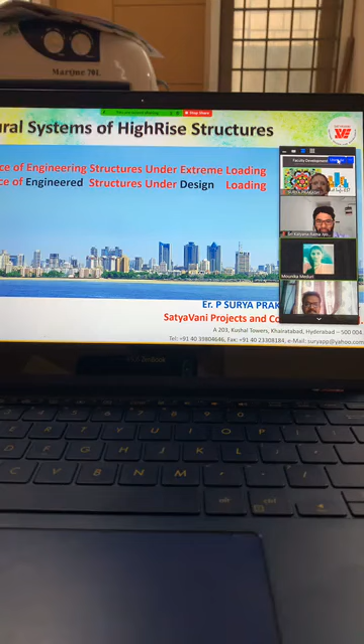The introduction is going on, introduction for me by the VBIT college. Give me 2 more minutes to start my lecture. I'm sure all of you don't need my introduction. I'll start my lecture in 2 minutes. Can you hear me now? Now my introduction is going on in Zoom. I could not get the live stream of the Zoom, that's why I'm silent. I'm hearing their introduction about me.

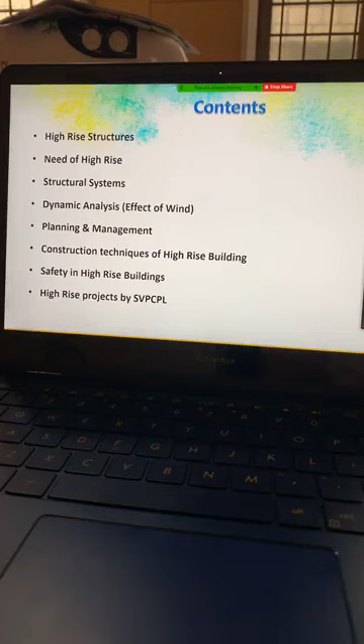What are high-rise structures actually? As per the National Building Code, any structure beyond 15 meters is treated as a high-rise structure. But structurally speaking, high-rise structures are the ones whose slenderness is very high. In that case, the behavior of a normal structure and a high-rise or tall structure differs.

In high-rise structures, my maximum experience is in lattice towers. I have done up to 213 meter tall towers for transmission. We have done FM towers up to 173 meters, microwave towers of 100 meters, lighting towers and lighting masts, and security towers. Security tower means ISRO, Sriharikota rocket launch station.

They need a 120 meter tall tower, putting the earthing wires, that is to prevent lightning attack on the rocket launch stations. And similarly, transmission towers, power transmission. These are all the tall high-rise structures. And masts. We also have masts or poles which are used for both transmission and lighting.

And very many people know about chimneys. Tall chimneys are also coming under high-rise structures. Hybrid towers. That means we had in one time about 30 years back a series of high-rise TV towers which are hybrid, like concrete shaft and then steel mast, steel lattice towers on the top for Doordarshan TV transmission.

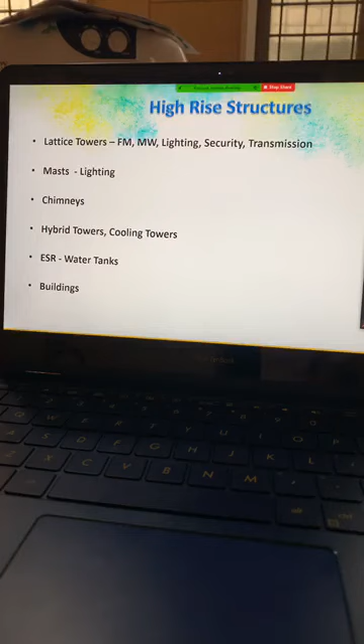Towards the end of my topic, I also did a case study comparison of various structural systems which I'll be covering as part of my lecture. I didn't mention it in the overview, but I have added that comparison this morning. So I'll be showing some of the pictures of these high-rise structures which we have done. Very interesting stories behind them, but I'll not go into all those details.

So we have done almost all communication towers in the country. Of whatever towers you see, one out of every two towers is designed by us. So that is my background. So here you can see FM tower, communication tower, and the police communication towers and the trilons. These are all the towers which we have designed and managed.

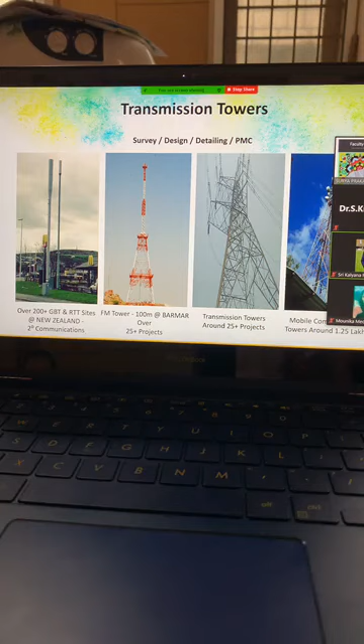And also these masts you are seeing, we have done in New Zealand, and an FM tower of 100 meters in Barmer in Rajasthan, and transmission towers of different types up to 765 kV. And then the microwave towers backbone we have done in India. So this is a high mast.

And this is another communication tower which we have designed for the backbone in Andhra Pradesh for Idea Cellular from Vizag to Hyderabad. And these are all guyed masts also. You will have the tall structure, self-supporting and guyed mast. This is the guyed tower which is used mostly in police communication towers.

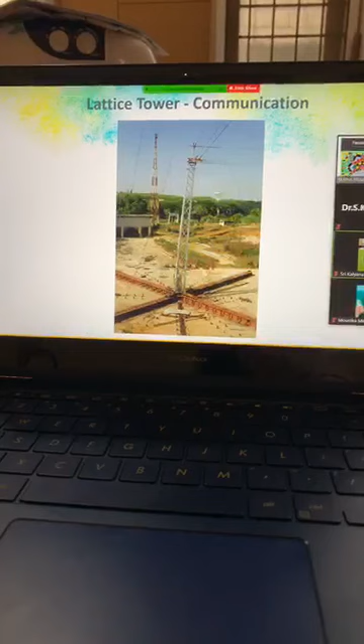So extreme loading means the condition for transmission towers is they should survive till destruction. So we test these towers till destruction. When we test these towers till destruction, they should not survive beyond 20% over and above the design load. So that is the challenge. So we have to be very accurate: 1.06 overload factor to 1.2. Only a 14% margin we have to design the structures.

If I design for lesser capacity, it will fail. If I design for higher capacity, my design is rejected. So this is the challenge in high-rise structures, really interesting. And so your design has to be accurate, your materials have to be of accurate quality, and then fabrication, galvanizing, erection, and then detailing of the structure. So this is the challenge really. And these are the hybrid towers. This is in Rameshwaram.

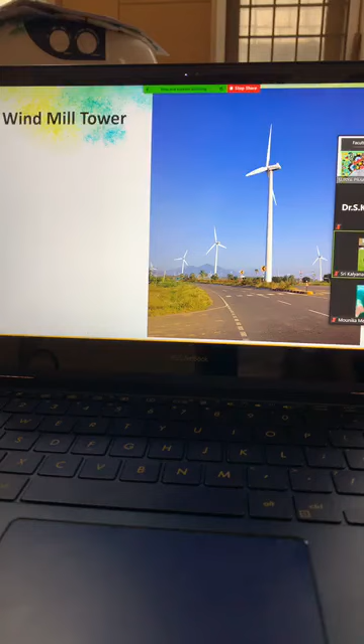So you will see this picture in Kanyakumari, very huge wind farms, with up to 1000 megawatts of power being generated through these windmills. And chimneys, tall chimneys. There are tall chimneys mainly in power projects and this kind of process industries. So chimney design also comes under high-rise structures. Design and construction methods are a challenge in this.

And the elevated storage reservoirs. We do the design of different types of elevated storage water tanks, and these all come under various structural systems. The biggest challenge in elevated storage reservoirs is seismic resistant design. So we have to be very careful in evolving the structural systems, and that's why nowadays we are seeing the funnel type and the shaft type of staging as against column and beam type of staging for these elevated storage reservoirs.

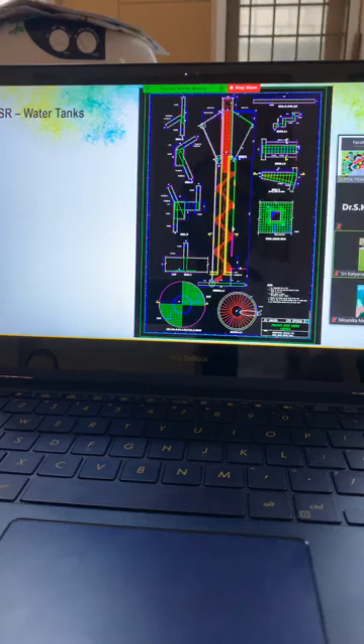So this is another type which we have designed. You have the dome, you have the conical shell, and then we have the cylindrical shell. All these structural systems and detailing, a very interesting structure we have done in Chiralas coastal region. And these are the closer views of these structures.

I am a lover of Santiago Calatrava in terms of structural system, because without ribs, there is no structure. There is a commonality in any type of structure, whether it is an auditorium, a high-rise building, or a bridge. He brings in the common element of the concrete ribs in this. So that's why I've chosen to show this high-rise structure also in my lecture.

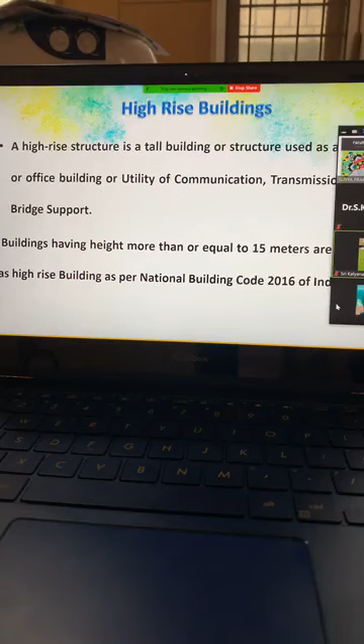Now, we are getting into the core of the topic, that is high-rise buildings. High-rise buildings are very tall structures. As of now, we have the 828 meter tall building, Burj Khalifa. And buildings having height more than or equal to 15 meters come under high-rise as per National Building Code 2016. Because of safety reasons, they defined these high-rise structures.

And we have this high-rise structures code also, IS 16700:2017. There are a lot of debates going on about the applicability and implementation of this IS 16700. That's why I wanted to share some of the important points of this 16700. The code is based on a prescriptive approach. This is in the preamble, covering the design aspects of tall buildings, and the standard is applicable only for buildings that house 20,000 or fewer people. Also this code covers buildings of height greater than 50 meters and less than 250 meters.

So this is the code applicability, the scope of the code you can see. The standard addresses structural wall systems and moment resisting frames, and structural wall and moment resisting frame combinations. And we have flat slab floor systems with perimeter moment resisting frames, structural wall frame tube systems, tube in tube systems, frame tube systems, and hybrid systems of all these. And we have multiple tube, that is bundled tube, and any of the above with traditional framing systems, for example trusses, belt trusses and braced frames, are also covered under this code 16700.

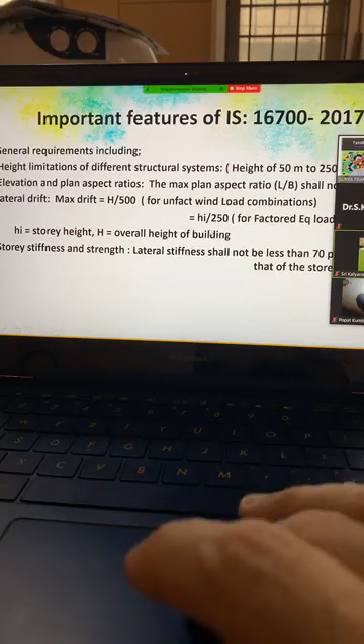So the general requirements are defined regarding the lateral drift. The main important point in high-rise structures is the lateral drift. The lateral drift for buildings is different, and for other structures it is different. Let us please note: height by 500 for unfactored load, and height by 250 for factored load. The height limitations of different structural systems mentioned before are for 50 meters to 250 meters, and the relative story drift is Hi by 250 for the factored earthquake loading. So these are all the limitations. And story stiffness variation between two subsequent floors should not be less than 70% relative stiffness.

And density of the buildings is defined by modes of vibration, that is basically the natural period and fundamental vibration. Torsion in vibration shall not exceed 0.9 times the smaller of the natural periods, and floor systems and all floor slabs shall be cast in situ. For precast floors, a minimum screed is specified for diaphragm action.

And of course in precast anyway we have these joints, and for construction requirements also we will be providing the screed of 75 mm. And most of the provisions of this code will be applicable to seismic zones 3, 4 and 5. That means almost 60%, 70% of our country is under zones 3, 4 and 5. And minimum grade of concrete for these high-rise structures shall be M30.

So wind and seismic loads, load combinations and acceptable serviceability criteria for lateral accelerations all are defined in this code, and structural design aspects for various applicable structural systems, and issues to be considered in design of foundation, and systems needed for structural health monitoring. This is very, very important when we go for high-rise, because of the safety of the people involved in the high-rise structures. We have to have the structural monitoring devices.

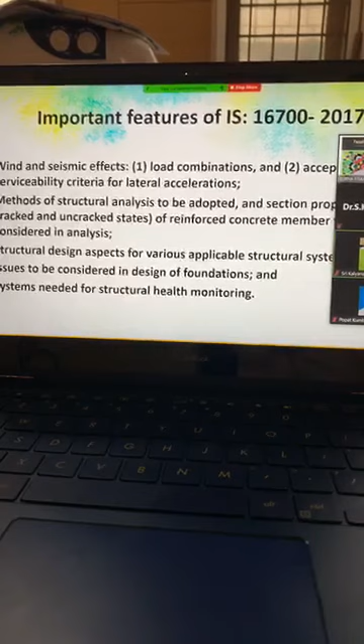In fact, Pradeep Ramancharla of IIIT is leading in this. He has installed the structural health monitoring devices, that is sensors in the structures, in almost 10,000 buildings. In fact, one of my buildings also he has installed, so that they will be monitoring any unusual activity in the building, so that we can raise an alert for the inmates of the building, because safety of the people is very important in the buildings.

So let us go into these different structural systems for high-rise buildings, which is very interesting. And these are some of the photographs of high-rise structures in our country. We have 33 floors, we have 60 floors in Mumbai. Mostly these high-rise buildings are used for residential, hotel and office buildings because of the cost of the land.

And now we are seeing the most interesting structure in the world, and I like this. I have visited 4 or 5 times during construction itself, this Burj Khalifa, and it's amazing. It is the best structural system I could come across, because it is the tallest structure and most efficient structural system, and it is a stunning work of art also. That is the look and appearance. It looks the most healthy structure, and it is an incomparable feat of engineering. That's how we will say. And in concept and commissioning, Khalifa has no peer so far, because it was completed in exactly 3.5 years.

I visited this structure in October 2004. There people were doing the foundation piling, 3 meter or 2 meter diameter piles up to a depth of 60 meters. And then by October 2007, I visited this site, and the 166th floor was under construction, in exactly 3 years. And the beautiful part of this structure is, I keep telling, the structural engineer was not given the actual height at the time of conceptualizing this structure. They had only told him it is 500 meters.

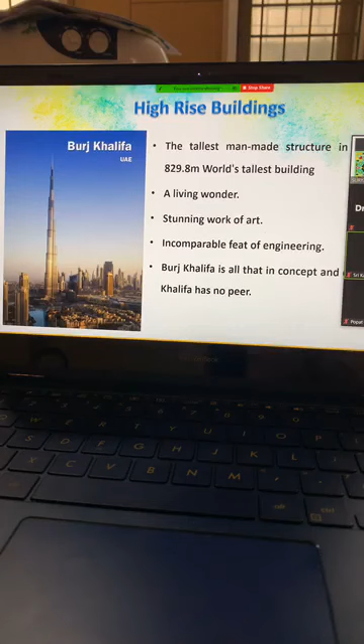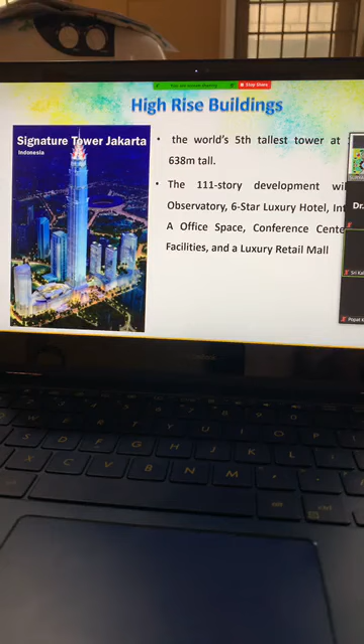There are so many beautiful stories for every structure, high-rise buildings actually. For every high-rise building there is a story, and I keep attending Structural Engineers World Congress every 2 years, in which almost all these structures designers have presented their design philosophies behind these. It's very interesting to know that. And this is the signature tower in Jakarta, which is 638 meter tall, almost 5th tallest structure in the world. I'm just showing the photographs of these structures. I'll discuss various structural systems as we move forward.

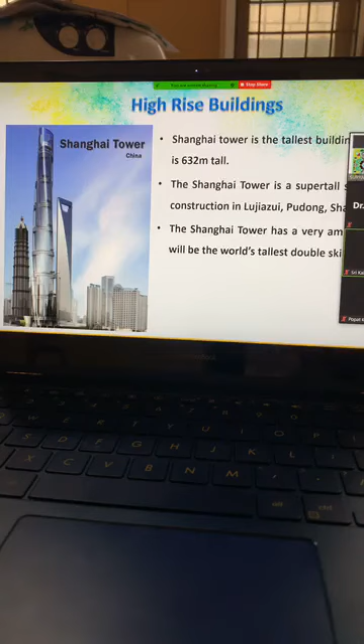And then need of high-rise buildings. So let us discuss the need of these high-rise buildings, because in some of the urban areas in Delhi particularly, we see that the land costs have gone up to 1 million rupees per square yard, or 500 crores per acre. That kind of land prices when you have in Mumbai also, we have square feet of building being sold at 30,000 rupees, in which case the land component is very high, whereas the construction cost component is about 5,000 to 6,000 rupees. So it is always worth increasing the number of floors and increasing the FSI wherever the land prices are very high. That's why we need to go for high-rise buildings in this fast pace of urbanization.

And whenever we talk about these structural systems for high-rise structures particularly, every force component becomes predominant. Whether you call it tension or compression, you have the shear in both the directions, or torsional moments and actual flexural moments. So we have to be very clear about the behavior of these structures when we are designing the high-rise structures.

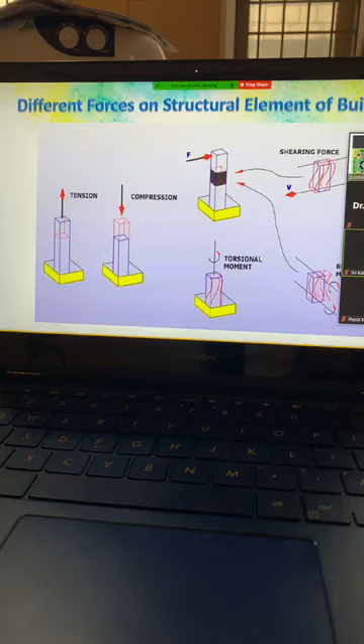So the types of interior structural systems in high-rise buildings. We divide the structural systems into two categories. One is interior and the other is outer or peripheral. So we have shear truss systems, we have the shear wall systems, and we have the core supported outrigger system, and we have combinations of these. These are all the interior structural systems.

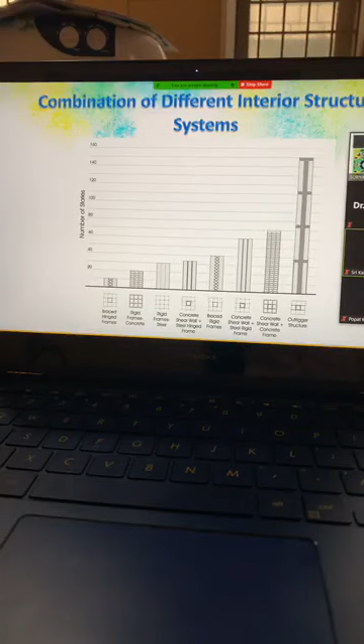And then we can see as the height increases, the comparison of different interior structural systems. So here you can see the braced hinged frames. Here we can see the rigid frame as we cross 20 stories and beyond. And rigid frames in steel as we cross 30 stories. And we have concrete shear walls beyond 30 stories. Also, shear wall is required. And then we have braced rigid frames. In place of shear wall, we can have bracings also.

So we can have these braced rigid frames in addition to shear wall. And we have the concrete shear wall with the steel rigid frames. And then we have the concrete shear wall with the concrete frame, that is tubed frames. Beyond 30 floors, that means about 100 meters and above, we will be going for these tubed frames. And beyond 100 meters and above, there will be combinations of multiple systems. And here you can see the outrigger system.

So the shear trusses are laterally supported by vertical steel trusses. That means we have the vertical loading taken by the normal column beam system, and we have these shear trusses within that vertical frame to be supported by these steel trusses. And we have these lateral loads primarily through axial stiffness of the members. That means we'll take moment into a tension compression couple. And we have the concentric braced frames and eccentric braced frames, depending on the facade or form of the structure. And they're all treated as vertical cantilevers. That means we design the cantilever, so in a cantilever you have the tension and compression and shear, simple. So we design that, and connecting beams force the walls to act as a single unit.

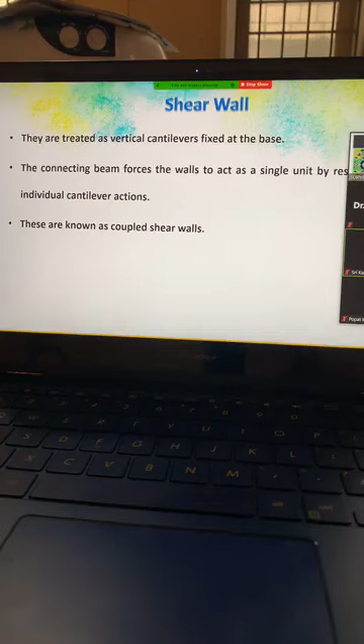The walls in the structure in the cantilever model will act as a deep beam, and a deep beam we all know is primarily a shear structure. So we also have these coupled shear walls. When we have multiple shear walls, we will be having beams that will make these shear walls act as a single beam, like a beam with web openings. It will behave like that.

So the shear wall concept is any structural system composed of braced panels to counter the effects of lateral loads acting on the structure. Shear walls are designed to resist the axial loads as well as the lateral loads. Mainly the lateral loads predominantly are by earthquake and wind. And the walls are structurally integrated with the roof slab. So we have very good efficiency in terms of diaphragm action, with walls transferring the shear and the diaphragm distributing the shear. So the torsional forces are minimized in these shear wall constructions, or in other words, people call it rigid monolithic construction. This is very efficient up to 20 floors actually.

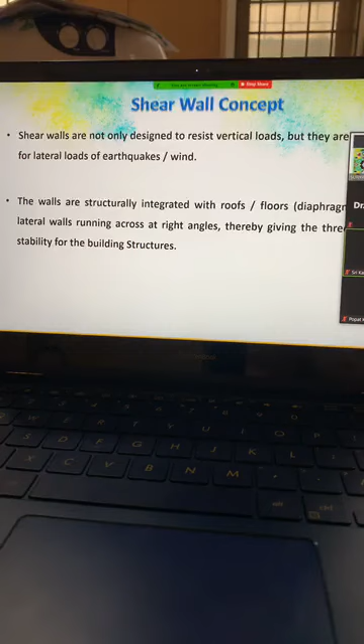This shear wall system with the slab without beams and columns is very efficient. The only thing is we have to plan the parking without increasing the spans in the basement, so that the structural system is efficient. Normally the planners tend to increase the span for the parking, but let us not worry so much about this parking. It is easier to increase the floor height rather than increasing the number of car parks by removing the wall. Any structural engineer has to convince the planners and developers about this point.

So, the classification of shear walls. We have this simple rectangular type shear wall which continues totally, and we have these coupled shear walls where we have two shear walls joined with beams, and we have the rigid frame type of shear frame and the core type shear frame. And this is the column supported shear wall. This is very bad actually. I don't support this, but still when we are forced to use it, we should go for this column supported shear wall.

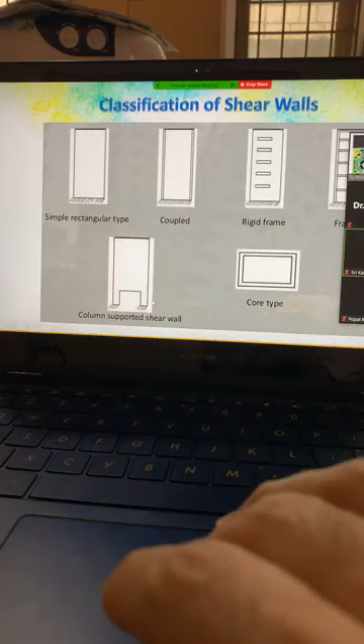And these are the frames, simple rigid frames. So this is the shear wall and frame connected to shear wall, and we have the slab in diaphragm action. This is a typical structural system up to 30 meters, that means up to 10 floors. This system is good enough. A shear core and a frame structure supporting the shear core. And rigid frames are normal framed structures with deep beams and columns. So it becomes a rigid frame action with a rigid joint. It can be used up to 10 to 35 stories, as I said.

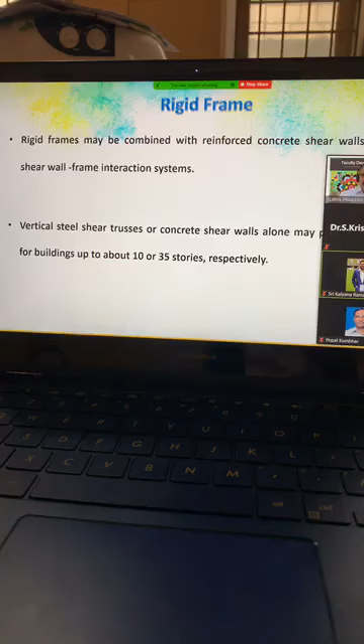So how does the interaction between shear wall and frame behavior happen? This is the shear wall interaction, you can see. Park and Paulay explain this phenomenon very well in Reinforced Concrete Structures by Park and Paulay.

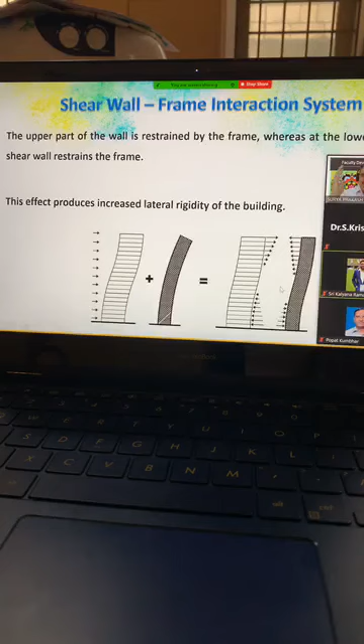So here you can see, if it is a pure frame, this is how it will deform. If it is a pure shear wall, this is how it will deform. So if you combine these two, the resultant behavior is like this. So they complement the forces and they will share the forces this way. So we can design this shear wall by taking these complementary forces.

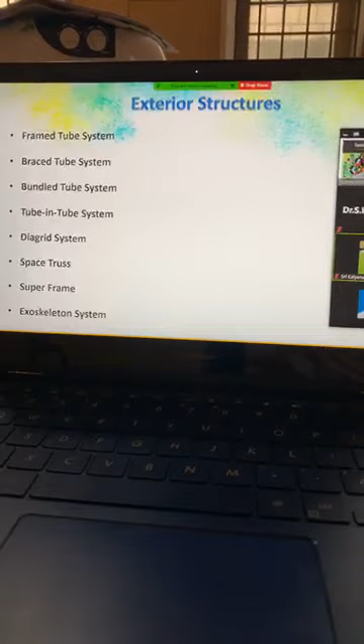Now, exterior structures. We have covered the interior structures in the buildings. Normally, with interior structures, we can design up to 30 floors, as I said. Now, these are all exterior structures. That means in this exterior structure, we will tackle the entire lateral load by using these exterior structures, like frame tube, brace tube, bundle tube, tube in tube, diagrid system, space truss system, super frame system, and exoskeleton systems. And as we know, the latest is the buttressed core, that is the Burj Khalifa buttressed core system.

So we can see these exterior structural systems. Here these are the structural systems. So concrete tubed frames up to 60 meters. You can go for individual tubed frame up to 60 meters, and you can go for steel tubed frame up to 80 meters. And this is a tube in tube. Also, instead of steel frame, you can use concrete tube in tube up to 80 meters.

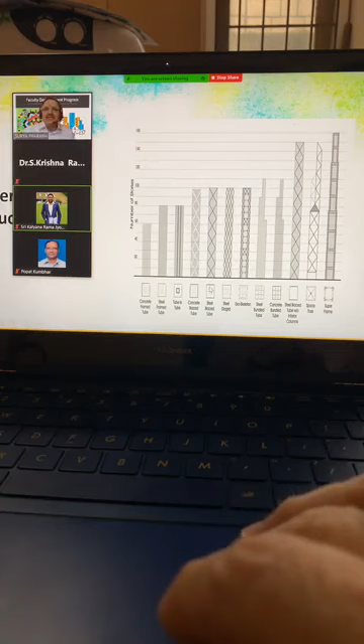And then we have this concrete brace tube. That means exterior frame, whenever we exhaust the size of the column and size of the beam, we will go for these braced tubes. And we have a steel braced tube here, and it is a steel diagrid. This is a diagrid up to 100 meters. You can go for a diagrid. And then we have the exoskeleton, and then we have the bundled tube.

This bundled tube is the Chicago Sears Tower, and then we have the concrete bundled tube. Here you can see the structural form, and then we have the steel brace tube with interior columns. So we will have the columns interior, but exterior we have a truss brace tube. And we have this space truss, that is Bank of China, the best example for this space truss concept. And then we have this super frame. Super frame was the structural system adopted in the World Trade Center. So these are all the exterior structures beyond 100 meters also.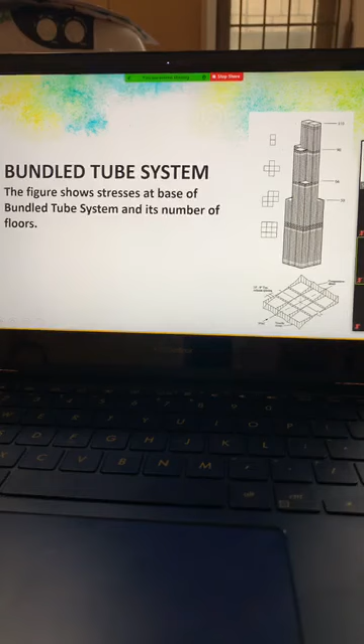So Sears Tower, for quite a long time, this was the tallest building in Chicago, a very beautiful structure, and this bundling and staggered termination of these towers itself breaks the monotony of the mass of the structure, and hence it has become a very popular concept.

The floor diaphragm in tube: the floor diaphragm connects the inner core to the outer core, and so it behaves as a tube in tube, because the inner core always makes sense in high rise, because the central core takes the ducts, fire ducts, electrical ducts, and we have the elevators. Transportation always is better to be in the central core. So naturally that forms the central core, and this outer tube is very efficient in terms of lateral load resistance, whether it is shear or flexure, and then the inner core is good for functionality, but you can utilize the stiffness of the inner core also by connecting the outer core and inner core. So that is the structural system.

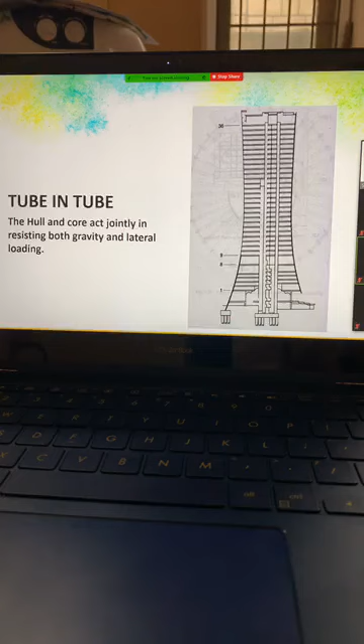So this is the West Madison Street building in Chicago, 207 meters. This is a tube-in-tube system. So this is how the tube-in-tube can be. The outer tube is connected to the inner tube by these diaphragms. It is like a beam with stirrups. You have the tension reinforcement, compression reinforcement, and the stirrups connecting the central core of concrete. That is the analogy we can draw.

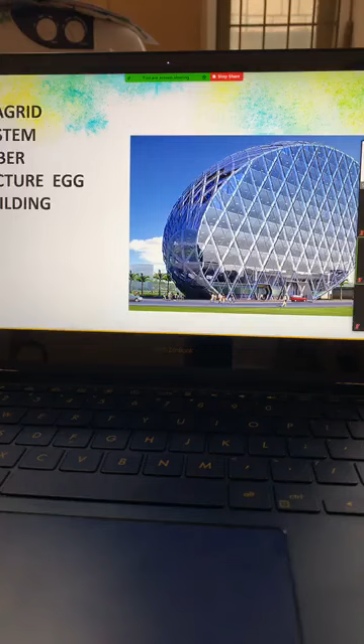And the diagrid system, most popular, it has become popular in Amravati. They have tried adopting this diagrid system for the secretariat, the tallest secretariat as proclaimed. And of course, this didn't go through. Personally, as an engineer, I am an opponent of adopting this system for this 50-storied building, this diagrid. But this is already used for the Cybertecture Egg building. The diagrid is very effectively adopted there actually. So I'm not showing that Amravati diagrid actually.

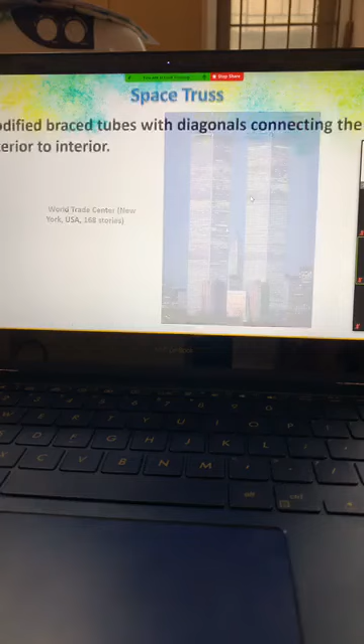Next is the space truss. It is a modified braced tube with the diagonals connecting the exterior to interior. So we are connecting the interior core by using the diagonals to the exterior frame. So this is a beautiful example of space truss we adopted in Bank of China.

So this is, you can see our simple truss adapted for lateral load resistance. And one thing you should see in all these things, the structure itself becomes the aesthetic feature actually. That is the beauty of it. So structural engineers play a great role in aesthetics also, in selecting the structural system.

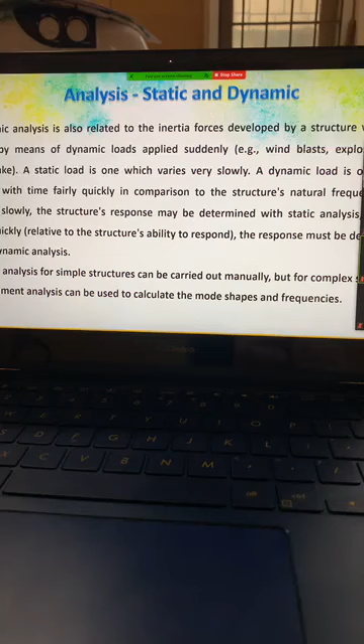So next is the analysis for these high-rise structures. A very important point is that dynamic analysis and secondary P delta effect analysis are to be done. And wind is essentially a large-scale horizontal movement. When we go for these high-rise structures, wind becomes very predominant actually, however small it may be, even in Dubai. In Dubai, the wind speed is much lesser compared to any Indian city, maybe comparable to Bangalore. But still, when we go to that height, the normal wind speed, which is 30 meters per second at the lower level, will go up to 60 meters per second as you go to the top. So we have to design for these wind loads, and we have to do the dynamic analysis even for the wind loads.

And for Dubai, for Burj Khalifa, most of the tall structures are considered in less earthquake prone zones actually. Otherwise it becomes very uneconomical. Otherwise we have to go for total base isolation and 5 types of damping systems. Like Japan, you have these damping bracings, pneumatic bracings, mass dampers, tuned dampers, all types of dampers we have to use in these tall buildings, particularly when they have to be constructed in earthquake prone zones.

So they have to become intelligent. There are controller actuated dampers also. You can feed the accelerograms, these seismic accelerograms of different earthquakes, and make a controller that will be used for actuating the dampers. So it's very important, handling the wind and earthquake with intelligent systems. Now the technology has advanced so much, we can minimize the dynamic effects on this structure by incorporating these things.

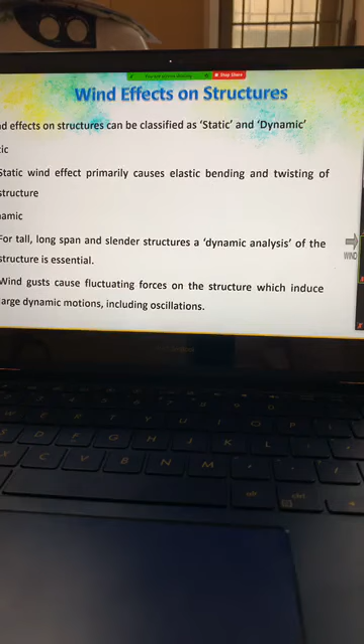For most of the buildings we take a 3 second gust. Whatever K2 factors are given is with gust effects. So when we go for dynamic analysis, we can consider the hourly mean wind speed, that is the reference wind speed, and we can design using the gust factor, which can be calculated considering the natural frequency of the structure. So these are the forces, how the wind speed varies. You can see the diagram, and these are the lateral pressures. There are 6 types of vibrations, so for all that we have this coefficient when we do the dynamic analysis.

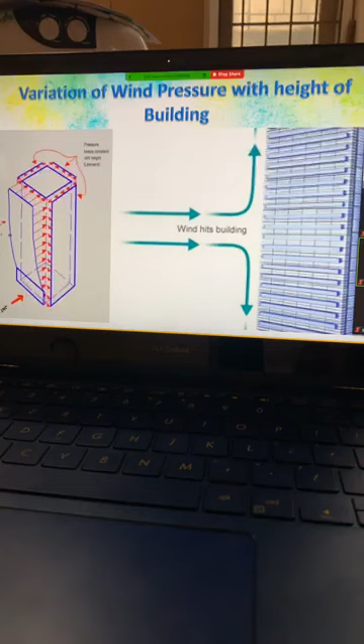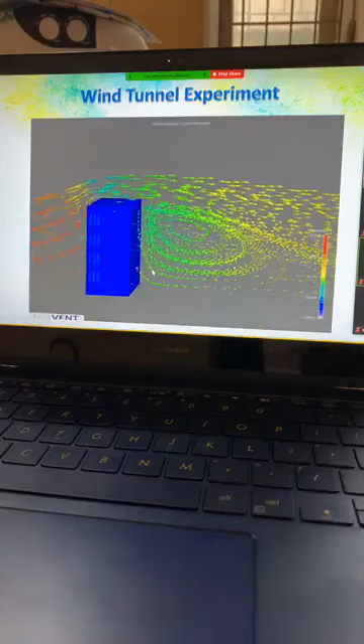And when we have 2-3 tall buildings, when we are designing, it's also very important. You can see the turbulence that is caused between the buildings, and here you can see the passive wind force that happens, the vacuum formed beyond this. So it's very important to study the wind flow in all the directions in such tall buildings. This is multiple, like New York, Wall Street, Times Square kind of areas. We have to have this kind of wind tunnel studies, so you will get the realistic picture. It's not just enough to calculate the coefficients of our own building. We have to study the effect of the adjoining tall buildings.

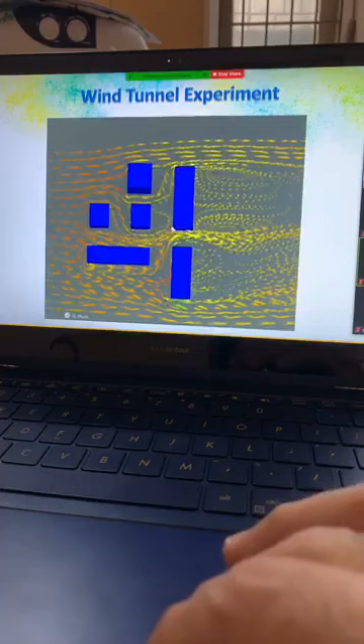You can see the tunnel effect here. So the facade on this building, you can see what will happen. This kind of wind tunnel studies will help us in estimating the realistic forces, even by considering the adjoining structures. These are typical wind tunnel experiments on the facades also, open facades. So these are all done.

And for earthquake, we have these shake table studies. Of course, we cannot do any prototype. They're all scaled models for earthquake. We have CPRI and SERC and some of the research centers having these shake table tests to study the effect of earthquakes, and particularly the effect of base isolation can also be studied for earthquake prone areas where we intend to design these high-rise structures.

Dynamic actions due to wind and earthquake require us to consider earthquake forces, and the design is primarily shear design. Earthquake is primarily shear because it is a sudden force, and there is no time for flexure. By the time the flexural force comes, the earthquake is gone, so we have to resist by shear primarily. That's why we calculate the base shear and the story shear in earthquake, even in dynamic conditions.

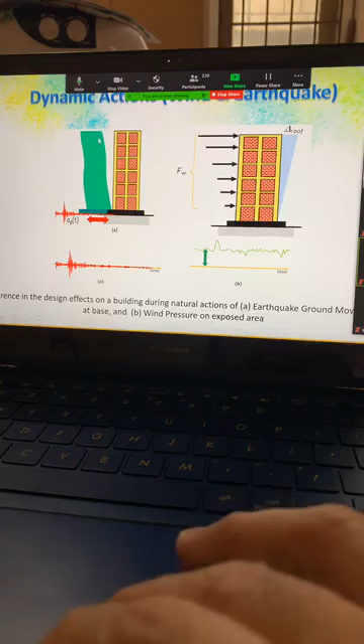So this is the infill frame effect. You can see the effect of earthquake, and this is the accelerogram that we have. We can use the seismic coefficient method up to even 30 meters if the base size dimension is almost like h by 5, between h by 5 to h by 10 also.

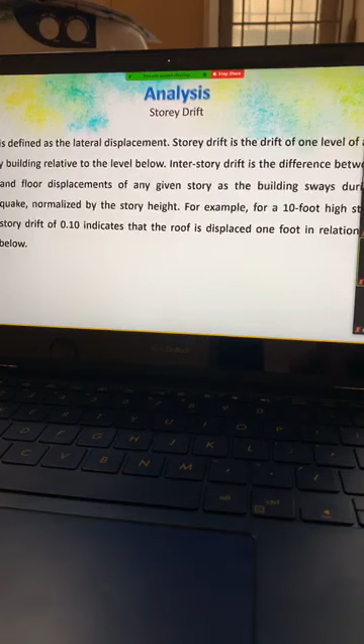The inertial forces and acceleration are important, and story drift has to be considered in the analysis. An inter-story drift of 0.1 indicates that the roof is displaced 1 foot for a 10-foot story height, so it's very high. We have to take care of this story drift and minimize it.

Story drift affects the joinery and it affects the infills if we are considering infill, so the design of infill depends on this story drift also. And the P-delta effect, the secondary effect in tall buildings, is very important in the analysis, so we have to go and do nonlinear analysis and P-delta analysis also.

For high-rise structures, as I said, we have done some analysis for a 40-story building for comparison of different systems, to see how it performs. I'll be sharing the results of that comparison as we move forward.

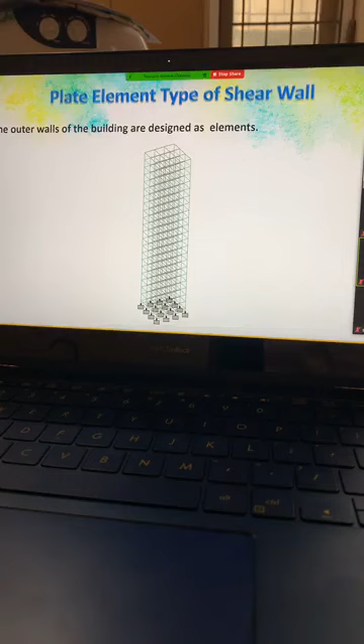Here, this is the plate element used as an infill shear wall, and this is the 3D rendering of it. We have the maximum shear observed in the columns at 620 kilonewtons here, shear at the base of the column, and this is the stress diagram of the plate elements. This is another plate element type of shear wall. In fact, modeling of the shear wall is very tricky.

A plate element is primarily a flexural element, a bending element. But for in-plane shear, we have to use a plane stress element. We can also idealize this shear wall using deep columns, which in fact gives a more accurate result.

We model the beam and the column as a shear wall, giving the beams zero unit weight for the material, and the columns give more accurate results for a high-rise structural analysis. This is the moments at the base of the building. By using that model, we have got 2,780 kilonewton meter in the column, that is the shear wall idealized as a column.

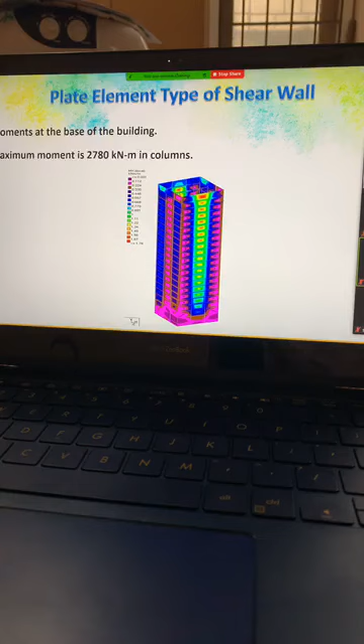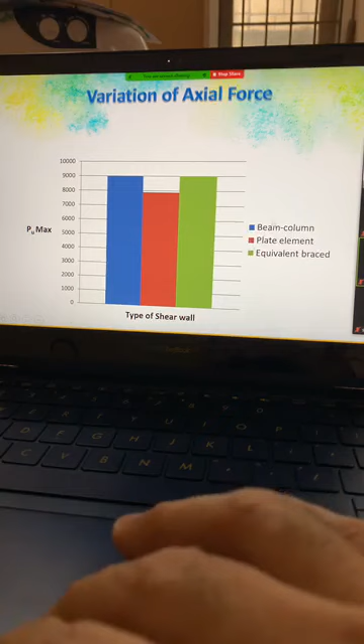Now the variation in axial force for different types of shear wall modeling. If you use beam-column, this is the axial force. And if you use the plate element, why I'm trying to tell you this is, I've seen many engineers say they will use the plate element. If you use the plate element, you will end up getting a lesser axial force. That's what I'm trying to tell you, because most of you will even be reviewing designs, so it's very important to consider this.

If you model the same structure as an equivalent braced frame, it will almost give the same result. So either you model it as an equivalent braced frame, or model it as column-beam, as I explained, deep column. Please never use a plate element for modeling the shear wall. Please note this, this is an important point I wanted to share with you.

So regarding moment, if you see it written as movement, that is wrong actually. So mu max in the plate element, because it becomes stiffer than actual, you will get a higher moment.

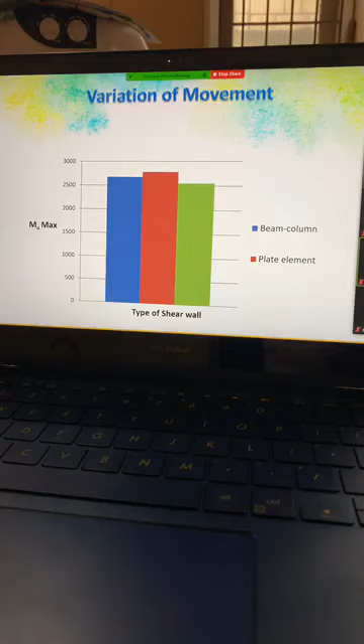It is always good to reduce the movement and have the realistic axial force. That's what I'm trying to tell you. Because the plate element is primarily a bending element, it gives you higher moments in the plate.

Whereas beam column gives you more realistic results, and the difference is not much compared to the axial force difference. Here, the axial force difference is almost 12%. And here, the difference is not even 5%, approximately 5%. So it is always good to go for a beam column model, even if it is a shear wall. It gives you a more realistic picture.

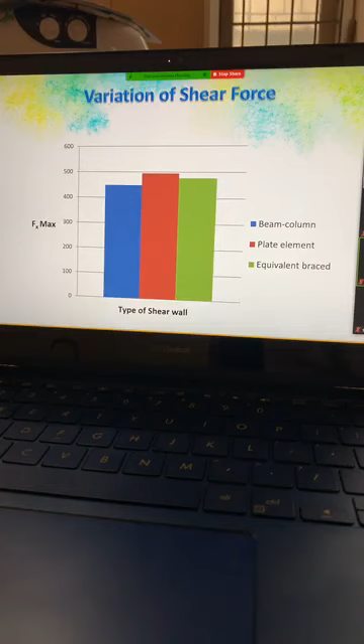And the shear force also is lesser, by about 8% difference in the shear force. So it is always good to design for higher axial load. That's what I'm saying, that the stability of the structure can be ensured by this, being closer to reality and the robustness of the structure.

So this is the base isolation, and now the construction phase of high-rise buildings. This is another most important thing. Whenever we design a high-rise building, we should not design in isolation. We have to consider the buildability of the high-rise building. It's a very important thing. So we have to consider various construction methods that are available for high-rise structures, because without being able to construct effectively with quality assurance, there is no point in efficient structural systems.

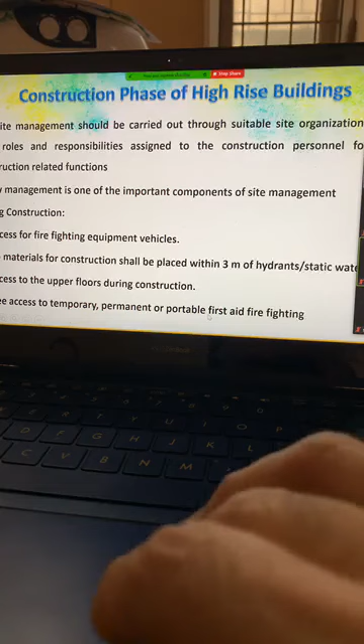So during construction, access for firefighting equipment vehicles. Even during construction, fire safety is very important. Materials for construction shall be placed within 3 meters of hydrants/static water, access to upper floors during construction, and free access to temporary, permanent and portable firefighting systems.

And time management, because for high-rise buildings, normally 3 to 4 years should be the time considered for construction. So any construction method, any technology that we adopt, any structural system that we design should be able to be completed within the time frame.

So that is a very important aspect. Then quality management, this is very, very important, because the safety of the people is involved. The quality assurance has to be 100%, almost like zero tolerance. So the system shall cover review of existing requirements, subcontracting of the materials, process, and controls during the process.

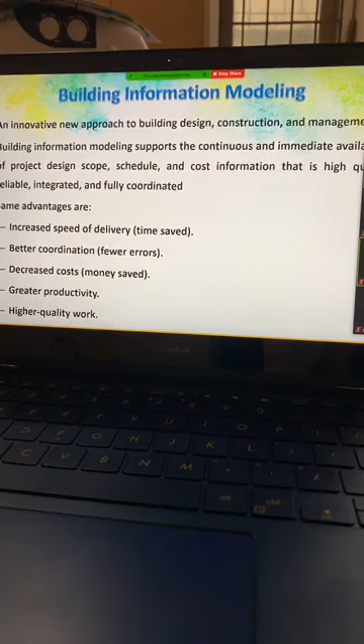And building information modeling will help very well, particularly because there are so many disciplines in high-rise construction. In addition to normal disciplines, we also have structural monitoring, monitoring of the people, safety monitoring, and surveillance of the structure. All this we have to incorporate. So BIM will help a lot in design and construction management: labor, concrete, structural steel, erection. High-rise management experience is very important, and so is the purchase and management staffing.

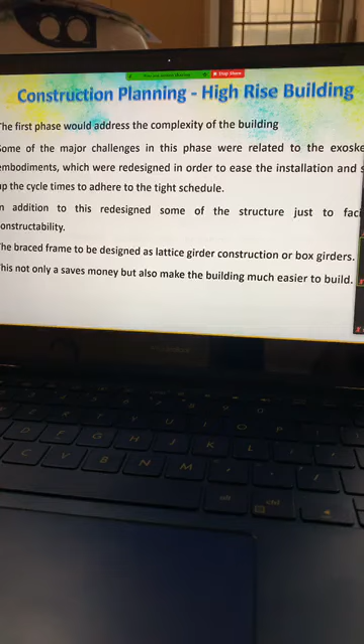So construction planning of a high-rise building should be done very effectively, considering all the risk factors during construction. And technologies to construct high-rise buildings: we have steel, one of the most efficient things apart from concrete. When we use concrete, the formwork systems are very important: auto climbing formwork, rebar prefabrication, and high performance concrete, very important for providing high strength, high durability and high modulus, and also pumping arrangements for the concrete. Advanced concrete pumping technology and a simple drop head, to reduce the cycle time.

The biggest thing in high-rise construction is the creep correction. Creep is going to play a big role, and creep correction during construction, considering the construction loads and analysis for creep correction, is very important. So this is the auto climbing formwork. Even Doka kind of formwork we have to design with the auto climbing system, and platforms are very important with the safety rail.

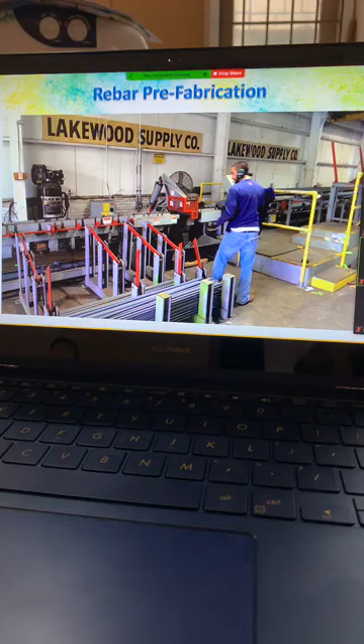Rebar prefabrication also is very important, because you cannot expect people to tie at the height of 100 meters, 200 meters. So we always have these pre-tied rebars. And the concrete pump, very high capacity pumps: for Burj Khalifa, Germans have designed special concrete pumps to pump up to 500 meters. And a simple drop head system formwork, that is to reduce the cycle time.

We can strip in 24 hours and keep the prop in position. So for that, this drop head system works very well. That means the prop will be in direct contact with the slab, but the form can be stripped from the slab. So this is the drop head system, how you can remove the panel. Actually, you can strip the panel.

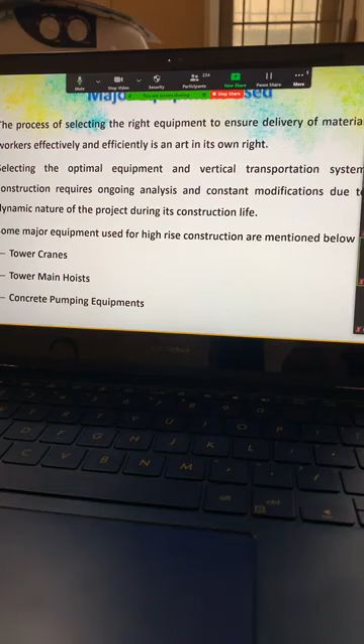And the process of selecting the right equipment to delivery of the materials, hoists or elevators, these are all very important. Tower cranes and the movement of the tower crane along with the structure, and tower main hoist and concrete pumping equipments. So these are all the important elements in the construction of high-rise buildings. And the hoist for passenger hoist and material hoist, multi-purpose material hoist also will be required.

And construction methods, innovation and modern methods of construction are very important for concrete used in, and we also can use precast flat panel systems. In fact, I conceptualized one 50-story building for one of the clients where we have used the super column, that is a steel column with a concrete infill, and then central core with the climbing formwork, and then precast hollow core with the steel girders. So this is the diaphragm action, and outer frame is with super columns. It worked out to be very efficient and effective.

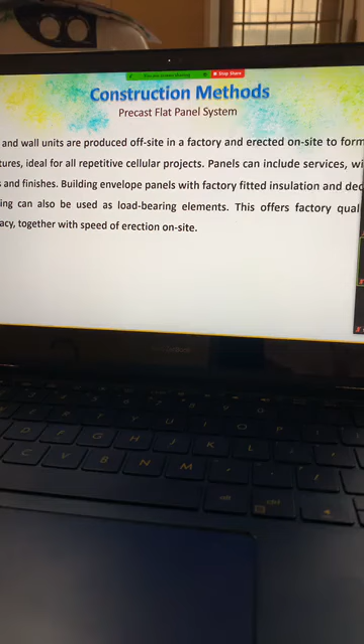So this is the precast flat panel systems which can be used even in high rise, and 3D volumetric construction, that is modular construction. When we have these shear cores, we can use the 3D modular core, and then it can be connected at every floor level through diaphragm. So it will have a very good effect and faster construction because it is easy to build such a modular construction.

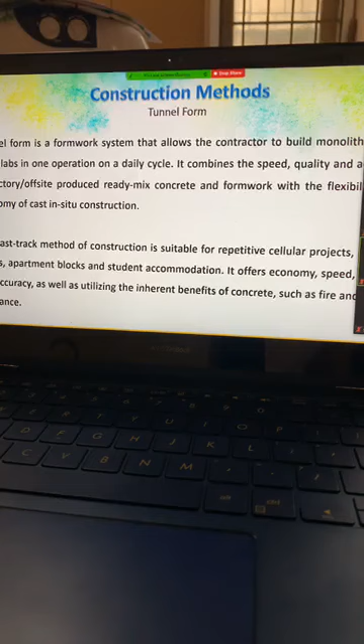Tunnel form. This is, of course, we use it in residential projects or hotel projects, very efficient, but safety risk factors have to be considered while considering this tunnel form. It's basically shear wall construction. So this is the tunnel form. You can achieve literally the cycle time of 3 days with this tunnel form.

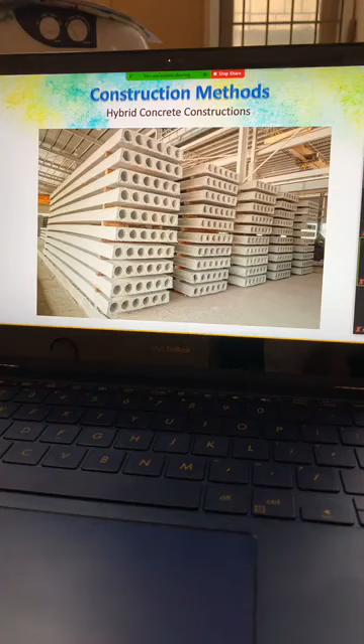And flat slab systems, but particularly for the office building, we use this flat slab systems for larger spans up to 11 meters, 13 meters, combined with post tensioning. It becomes very efficient and effective. Hybrid constructions, that means a combination of concrete and steel, composite construction also. So we have these flat slab panels, hollow core panels, and we have the steel girders, and we have the concrete core, and we have the steel super frame with composite column. So it's a combination of steel, concrete composite, precast, and central core concrete with the climbing form. That gives the best as of now in our country. It is very practical to construct using these methods.

And the pre-stress concrete is very important for high-rise because of the congestion in the reinforcement. We have to adopt this pre-stressing techniques also and post-tensioning techniques.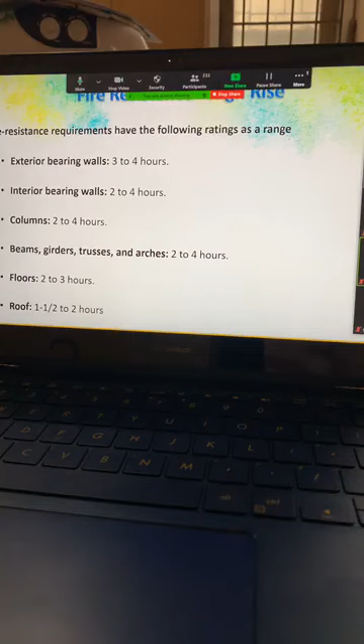So fire resistance, this is very important. We should not follow the same just 2-hour fire rating for the concrete or steel. So we have to go for exterior bearing walls, 3 to 4 hours of fire rating, and interior bearing walls, 2 to 4 hours of fire rating, and columns should have 2 to 4 hours, minimum 4 hours, and beams, girders, trusses and arches 4 hours. Floors can be up to 3 hours, and roof can be 1.5 to 2 hours. So these are the different fire ratings in high-rise structures. So fire safety is very essential. One should not design any structure without considering this fire safety.

So now we have come to the important aspect, though I quickly run on this. Comparative study we have done for a 40-story structure with different structural systems. So this is a framed structure, simple column and beam system with a diaphragm action of the slab, and here we can see the 2 shear walls in one direction. So we normally provide shear walls in the critical direction. Of course, here I have taken a square shape, but still we have done the wind for this direction only.

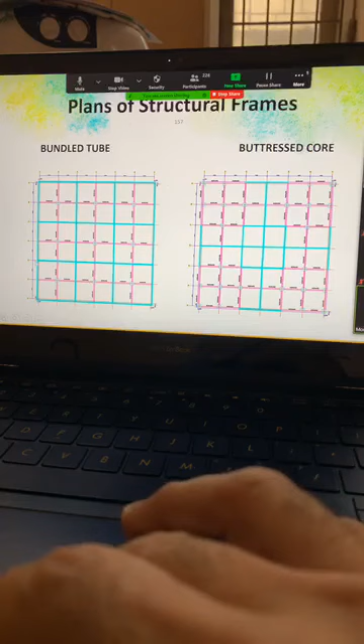And this is a tubed frame. You can see the outer shear wall, and this is a tube in tube, like we have the shear walls in the outer and also inner core shear walls. This is a tube in tube, and then bundle tube. So you can see there are 9 tubes here. So this is another system we have considered, and this is a buttressed core similar to Burj Khalifa. We have this central core, and we have this buttress, I-shaped buttress. So these are all the concepts we have done the study.

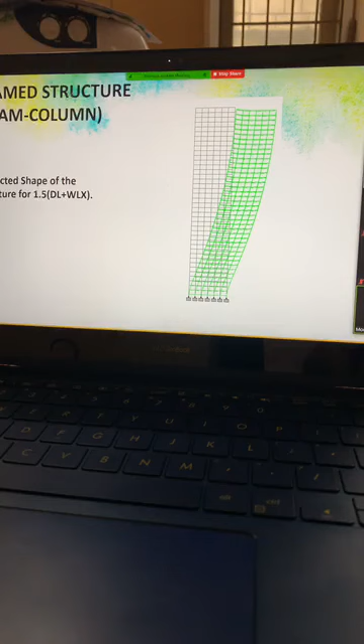You can see for all these cases we have extracted the deformation and shear, bending, we have compared actually. So this is the deflected shape for just dead load and wind load. You can see it's a column beam structure, and this is the shear wall structure, and you can see the model with shear wall inside here. And this is the shear wall structure.

The shear forces, shear in x direction and shear in y direction, are plotted here as contours. And this is the moment in the shear wall. As I said, moment in the shear wall will be lesser compared to modeling using the columns because of the element nature. 12% is the variation as we have studied. And this is the deflected shape in the shear wall structure.

And this is a tubed frame. The outer tube is stiffened and the inner columns are normal, to carry the vertical loads primarily. Once you stiffen the outer frame, automatically the forces in the inner frame will be reduced or lesser. So this is the shear force in the tubed frame, outer frame.

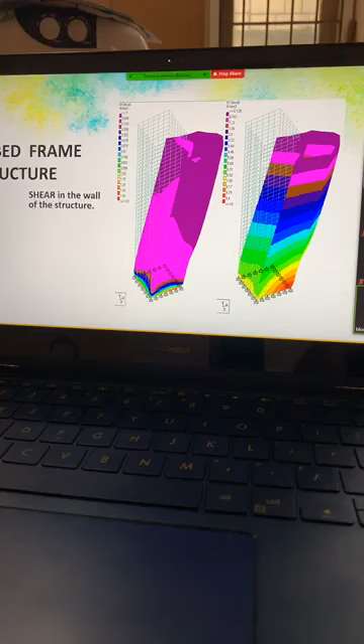You can see the shear lag in the corners mainly. And this is the moment in the tubed frame with a deflected shape. And this is the tubed frame structure deformation. So we always model it with the hinge at the base when we go for this high-rise structure.

And this is a tube in tube. You can see the inner core tube here and the outer core tube here. And this is the shear in the tube in tube system. You can see the reduced shear. I'll show you the tabulation at the end. And this is the moment in the wall in a tube in tube system. And this is the deformation of a tube in tube.

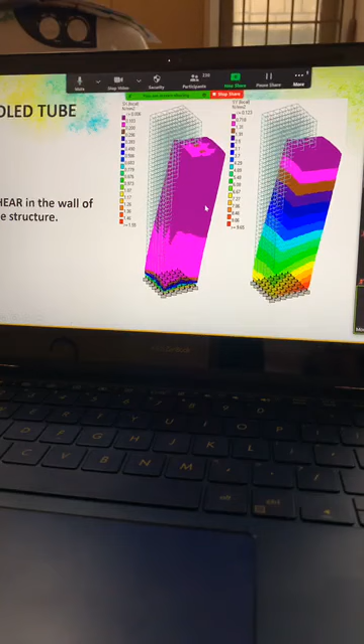Next is the bundled tube. Here you can see these are all the tubes. Of course, we have not done the staggering of this tube. And this is the shear in the bundled tube. In fact, you can see there is a lot of reduction in the shear force in the bundled tube. And the moment in the bundled tube also. And this is the deformation in the bundled tube.

And this is the buttressed core. This is outer, we have reduced the shear. Depending on the need, we decide these structural systems. So in a residential case, this buttressed core is very effective actually. That's what I'm trying to tell you. We have done a real project with the buttressed core. So, buttressed core with the shear in the wall.

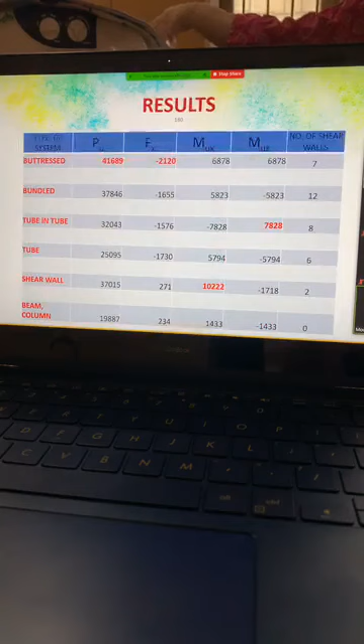This is the diagram. And moment in the walls, the stiff walls only, we have plotted the stress contours for the shear movement. And this is the buttressed core deformed shape. So finally, these are the results comparison for the various structural systems.

So this buttressed core is giving you the maximum axial force. So design for axial force is very effective and more reliable actually. That is why I always say that the buttressed core becomes effective and more efficient, because you reduce the moment and rely on shear and axial force. They are more reliable than behavior in flexure or torsion always. So in the buttressed core you get more axial force and shear and lesser moments.

You can see the moment plotting here. I have taken a symmetric shape. That's why you are getting the same moment. And these are all the maximum forces I have plotted. Bundled tube becomes very effective in terms of lesser forces and lesser resistance, but we have more material used

in the bundled tube. So when we talk about the effectiveness of these structural systems, we have to also compare the material used per square feet, whether it is concrete or steel. And we found that the buttressed core gives you the least consumption of materials, because any material, concrete particularly, is very effective in axial force and shear. So that's why you increase the axial force and shear and try to minimize the moments and torsion.

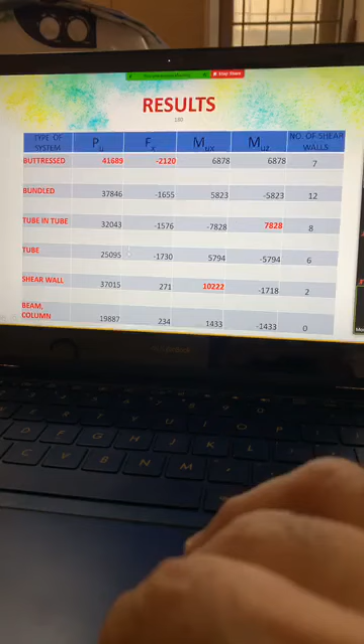But in the tube in tube, you have the maximum moment, you can see, and the shear wall also you get the maximum moment. Here you can see. So the tubed frame will reduce the axial force drastically, but the deformation will be higher for a tubed frame. And this is the beam column, least resistance, high deformation. So we have to consider all these factors in high-rise construction, particularly the story drift and deformation, which are very important to be considered.

So these are some of the examples we have done. I will share my experience in the design of high-rise buildings. Some people are asking, what is the highest building you have designed? We have designed up to 30 floors, the highest building in Hyderabad, which is about 100 meters tall. And in towers I have already shared. I have designed up to 213 meters, the tallest tower I have designed as a structural engineer.

So I am sharing here the buildings. The constructed floors are 2 cellars, stilt, and 24 floors in this building. And this is a buttressed core. Even before I knew about Burj Khalifa, I didn't know this word, to tell you frankly, that it is a buttressed core, but I conceptualized the structure like this and we have completed it.

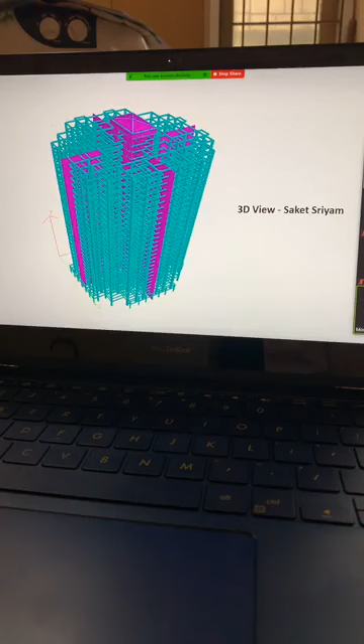And I always tell many people this is the most efficient structure in Hyderabad, I can say, because the steel consumption in this structure per square feet of slab area is 3.4 kgs only. Very economical thing we have done. The advantage I got in this is I have decided this structural system, and planners have done the planning around my structural system. In any high-rise structure, this has to be the process. The structural engineer should be deciding the structural system, and then plan should be done around it.

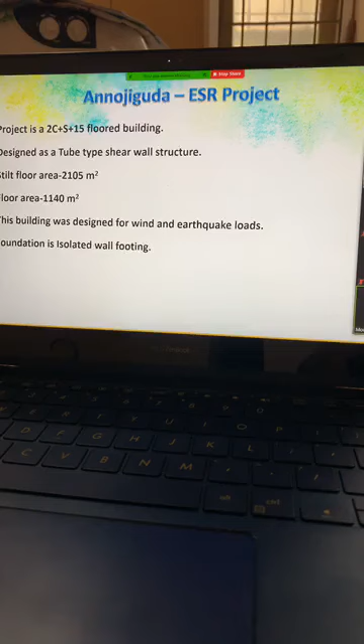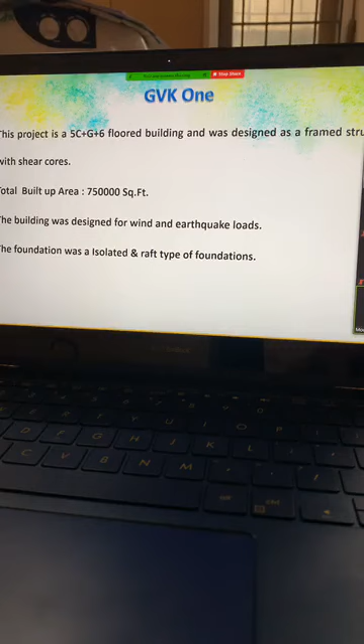So these are the projects and experiences I had with high-rise structures. So it's very interesting and thrilling to study, plan and design high-rise structures, and it's a great opportunity for any structural engineer to involve in high-rise structures or large span structures. And fortunately, I had reasonable opportunities in designing this. If you have any questions, I request the moderator to take questions from the chat box, and we have 20 minutes time to take the questions.